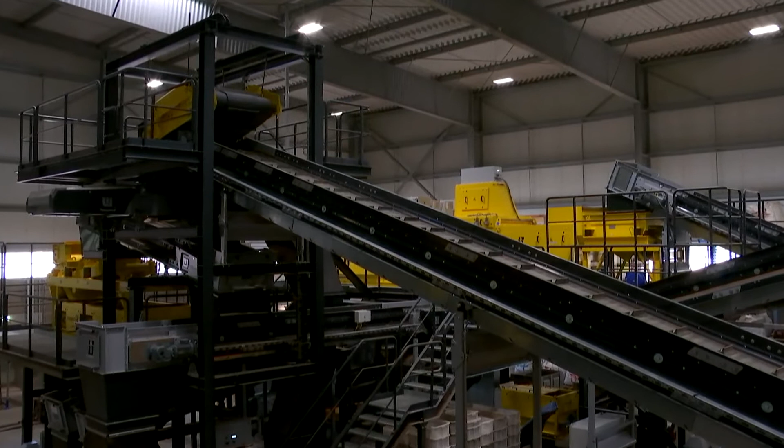We ran out of space at our headquarters in Cologne, and the space which is still available is hopefully needed for more production in the future. As we are doing this investment here, we are also building a new production and logistic hall at the original place downtown Cologne. So right now you have more space and maybe you are able to do more tests and maybe you can also react faster.

That's the goal, at least. But obviously, I think due to Corona, you can understand this, we will not have the chance to run directly at 100%. But the investments are done and the groundwork here, what you see on machines and technology, is already fixed and finished. And for the near future, months, years, we also need additional staff here to work with all these machines. And that means if there's someone out there interested in an interesting job in the resource and recycling industry, get in touch with us.

Yeah, you've heard it, you can apply here. I think about it, yeah.

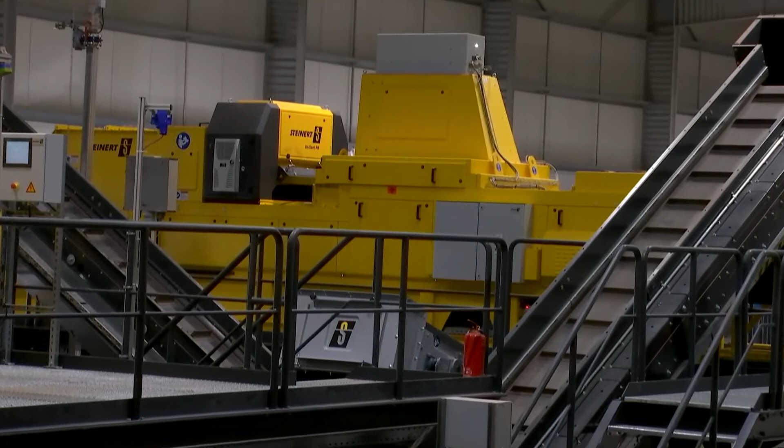So you have spoken about these three divisions. So we have all these 3 divisions under one roof. Exactly. It was a discussion to have, for example, mining elsewhere, but we decided to have everything under one roof because we learned that the application engineers will benefit greatly from each other, from their experience, from their ideas, and therefore we have everything here inside. Another advantage is that our R&D engineers are nearby.

Is everything ready by now? As you can see, the mining line is already complete, finished and commissioned. And what we are here for is the opening of the metal recycling plant. This is finished, and we will see it a little bit later in our video.

By the end of the year, we will also have a waste sorting plant with state-of-the-art NIR technology from our colleagues at STEINERT Unisort in Zittau, right here where we are standing. It's a similar size to what we've done so far. And in January, we will relocate our line sorter, LSS LIBS, from Cologne here to Pulheim. Then we will be able to fulfill the full range of test work for aluminum sorting and alloy sorting here in Cologne, in Pulheim as well.

So I can summarize, everything, all applications, all products are under one roof. Yes, exactly. And in these 3,500 square meters, all 3 divisions are here, and every division has its own industrial scale sorting plant, and this is important.

This enables us to simulate customers' needs. And when we get a task, we can really evaluate the feasibility and the return on investment for the customer. That gives him the certainty to invest into our products and to make his complete investment, which is normally more than just our machines.

I think everyone here spends time both hands-on the machine in the sorting plant and also at the desk or in the lab. So there's no clear demarcation. They can work closely together, R&D, application, and whatever.

You don't only have this new test center, you have test centers all around the world. Yep, over the last years we invested into different test centers everywhere we have subsidiaries, on different continents, in Australia, Brazil, and in the United States. We have production, sales, and after sales, and now we also have test centers everywhere, which is very important to be near the customer, to enable him to get an answer on his sorting task quite quick and near.

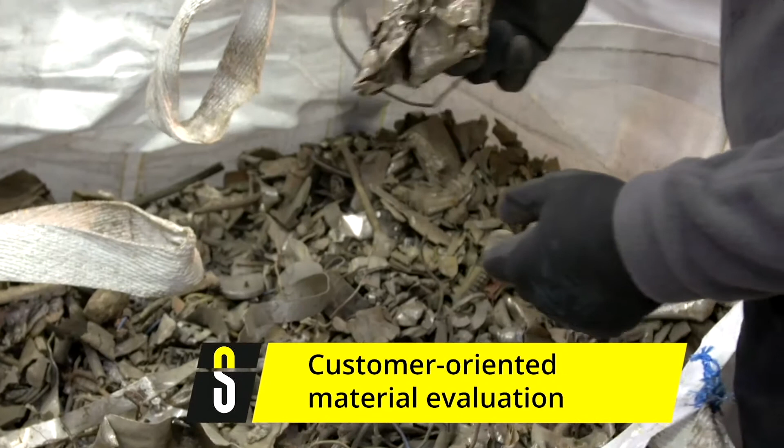Customer test requests often exhibit similarities at first, but tend to differ in detail. We like to receive the material up front to get accustomed to it with pre-trials. Ideally, the customers are present during the testing. Normally, this is the case, and it gives us the ideal conditions to find the best solutions for the customers and their sorting tasks.

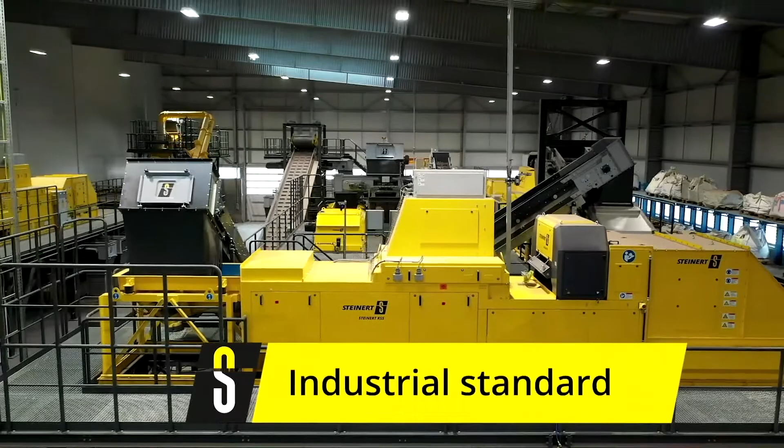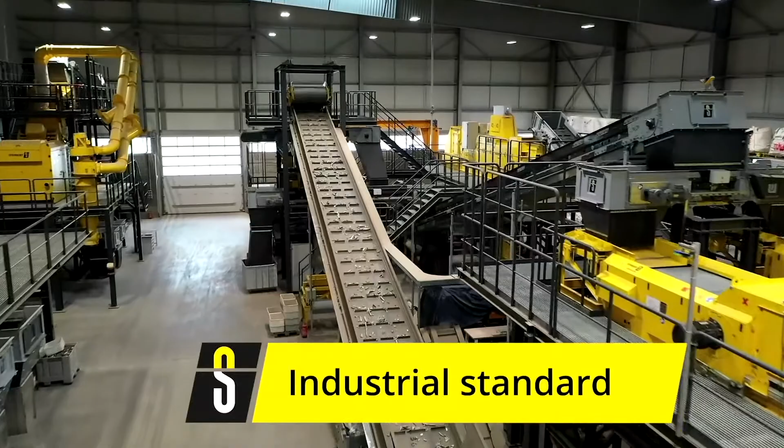With the first test center, we already decided to set up a processing line with industrial scale dimensions. We have stuck with this approach. We focused accordingly on a very flexible process sequence. This was completed with a recirculation flow option for the test material in order to optimize the identification of the right parameters and settings.

The aim of a customer test at STEINERT is generally to develop the right process in accordance with the input material and sorting target. The initial discussion is used to explain ideas and make suggestions on how to proceed. After testing, the results are discussed to create transparency in this type of consulting.

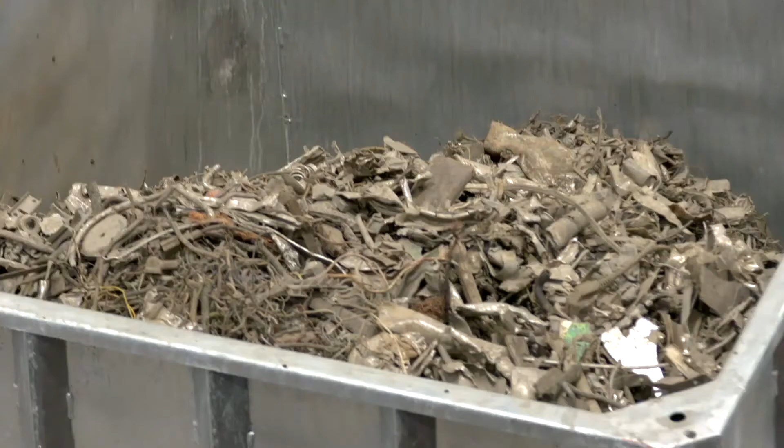The feed hopper already demonstrates that we are working at an industrial scale. The test material is introduced in batches of 0.5 to 2 cubic meters at a time. These quantities ensure that we generate reliable results on the solution that we are recommending to our customers. The material amount for a test mainly depends on specific material parameters.

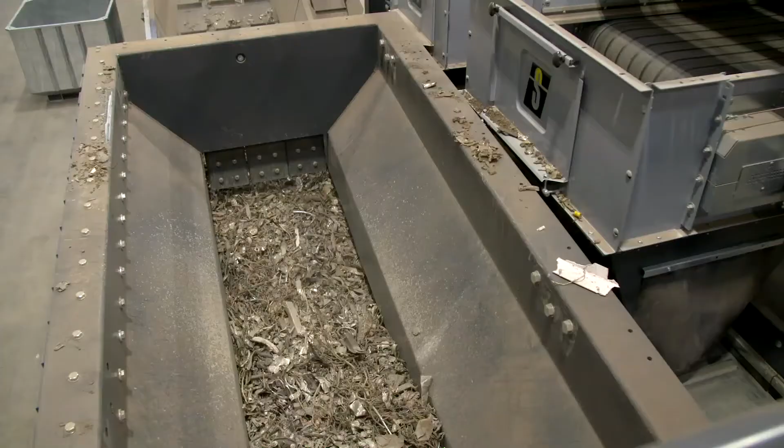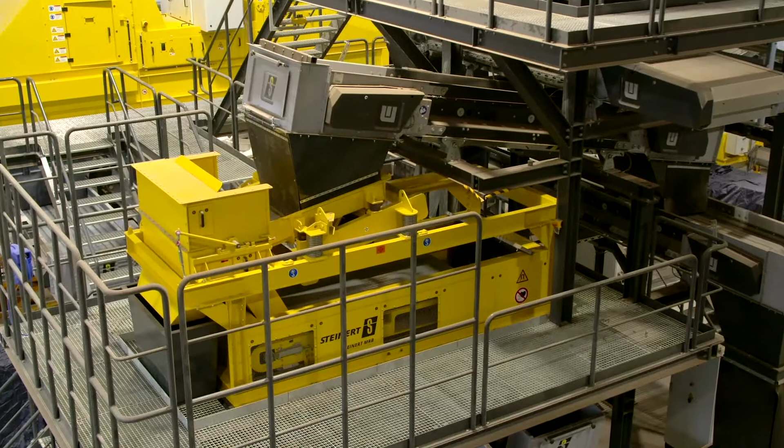The processing line is equipped with different magnetic separators. These vary in material removal method, either pickup or overfeed, and with regards to the magnetic field strength. This provides a choice depending on the requirement between quality of magnetic product and the extent of the ferrous removal.

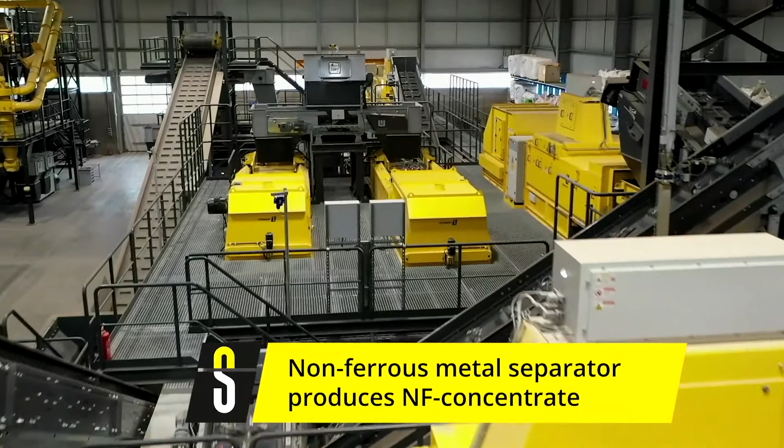After the ferrous removal, a lot of input materials are subject to a non-ferrous metal separation step. For this, we use non-ferrous separators, also called eddy current separators. We implemented the most recent design with a number of variable parameters. In testing, the system is chosen according to the particle size range of the input material. The product of such a non-ferrous separation is a mixture which, depending on the input, consists of aluminium, copper, brass, zinc, and other non-ferrous metals.

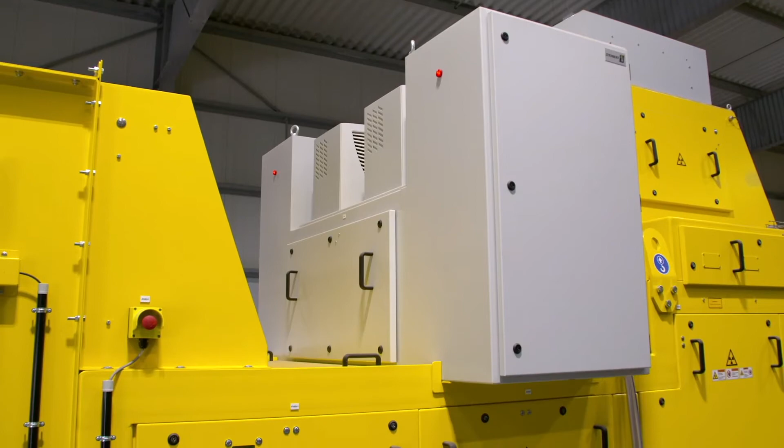In addition to the magnetic sorting systems, the second main group of products are the sensor-based sorters. We offer machines equipped with a single sensor for material recognition. Furthermore, we have been focusing on a combination of multiple sensors over the past 10 years, and we advanced to a system that combines up to 4 sensors. We call this a combined sorting system, or KSS. The abbreviation is derived from its German name. With this, we're able to solve numerous sorting tasks with high efficiency and flexibility.

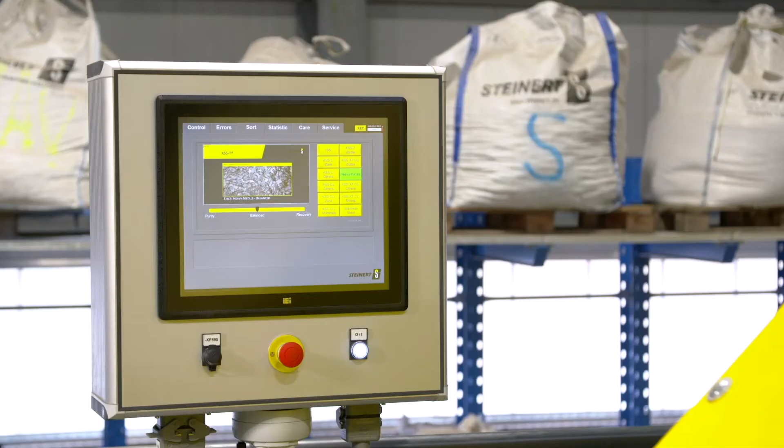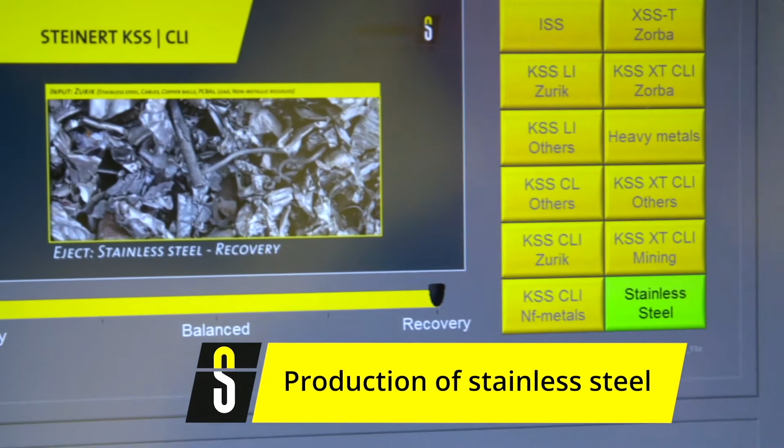The interface on the control has been designed so that it is almost self-explanatory, and especially the sort program selection can be designed individually with program name and image according to each customer. The system has room for 60 completely independent sort programs. It can be used for pre-concentration of special material groups or properties, up to the generation of high-end products.

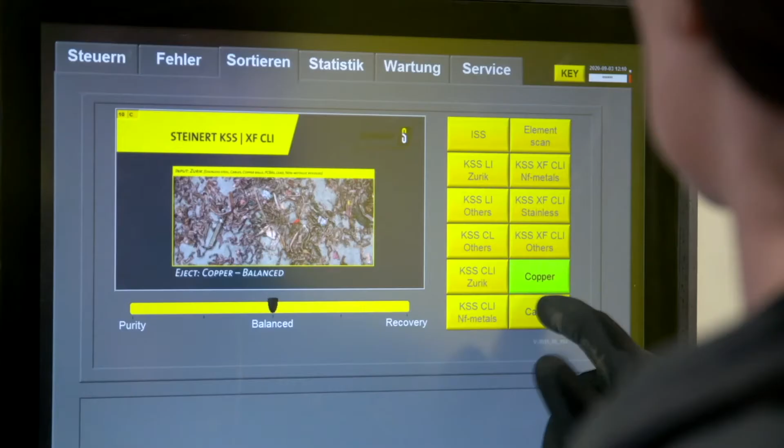The majority of stainless steel items will report to the rest fraction of a non-ferrous separation. From this, it can be sorted into a concentrate by means of sensor sorting. Depending on the combination of sensors in a KSS, purities of up to 99% can be achieved. Further processing steps can be utilized to remove additional material groups from this non-ferrous rest fraction.

Inductive sensing by itself or in combination with other sensors is used to separate a cable or wire product with highest purities. These cable products can then be brought into specific processing lines in order to reclaim the copper.

At this point, we are looking at the non-ferrous concentrate from the eddy current separator again. Using an X-ray transmission sorter, XRT, we are able to separate materials according to density. This system can be used to separate the light and heavy metals which are contained in non-ferrous concentrates from one another. The sensor image of an X-ray transmission system shows the material in a grayscale picture.

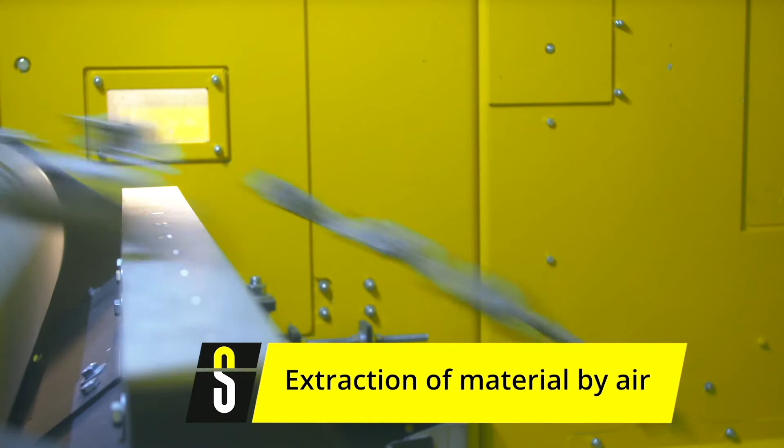The extraction of objects out of the material stream happens via compressed air bursts from a valve bar. The example shows the extraction of heavy metal objects out of a non-ferrous concentrate. The light metal product consists of numerous aluminium alloys and often contains small quantities of high alloyed magnesium. The heavy metal product mainly contains copper, brass, zinc and other heavy metals.

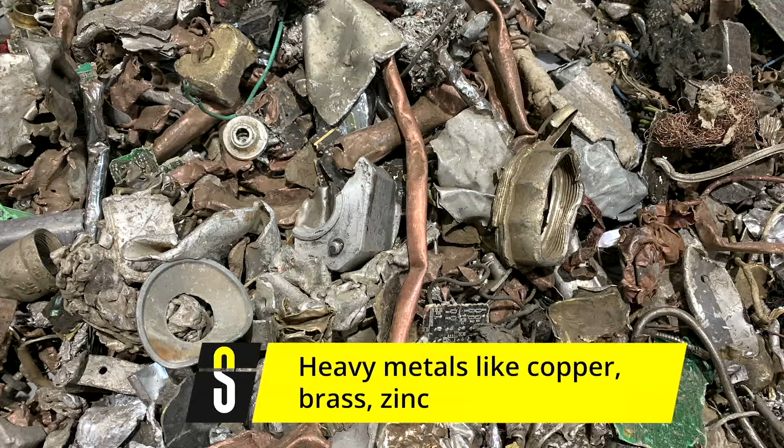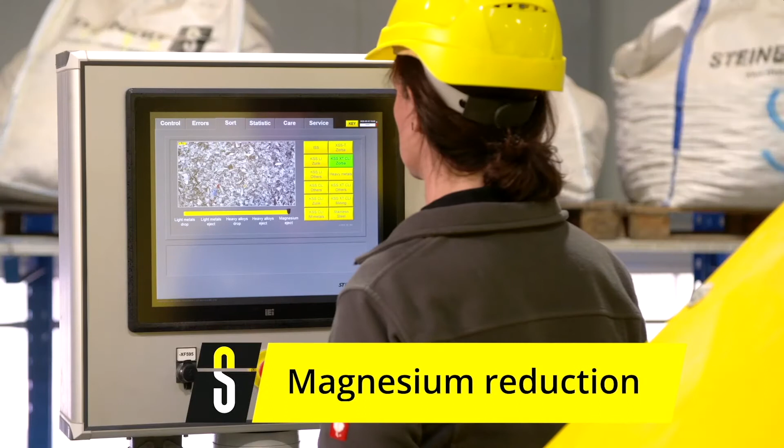These can be further separated using X-ray fluorescence. We will come back to this point at a later stage. X-ray transmission offers additional possibilities for efficient material processing. The light metal fraction, for example, can be further separated to generate a wrought and a cast aluminium concentrate. Furthermore, with some special adjustments to the detection, we can achieve a separation of free magnesium pieces of up to 97% to generate high-quality aluminium products.

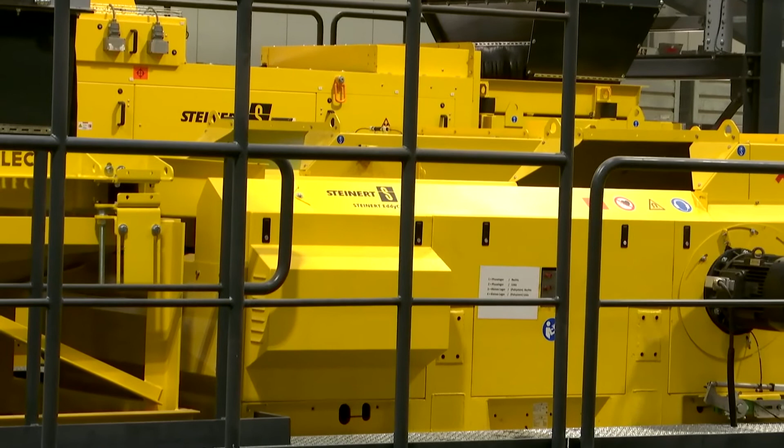We have STEINERT magnets and eddy currents in use and like the way they are engineered in their reliability. Are you planning new developments? Good to hear that this customer likes our technology. We have heard a lot of sensor technology today, and for the moment it's a market need to be more in this complex technology to follow the requests from the market. But we all know that sensor units can only work if a really good magnetic separation is working up front. Historically, we are coming from this kind of magnetic separation, and for us it's still a really important product. Yes, we are doing more development to increase performance, and to give better handling opportunities for customers. This is in work and it will come soon, but I don't want to go too much in detail now.

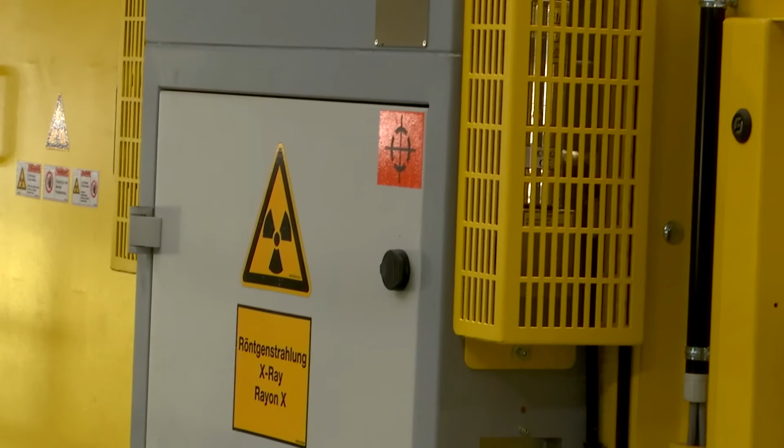Yes, it exists, and it exists here at the test center. We have it here, we can do tests with it. We use X-ray fluorescence technology for this. This technology creates a very deep analysis of metals, and precious metals are also heavy metals, so we can detect and separate, for example, gold, silver, platinum. It's an important issue in the e-scrap business. That means out of e-scrap we recover these precious metals, as well as from incinerated bottom ashes. Golden rings, everything is in. You can't believe all of this we can eject with our fluorescence units.

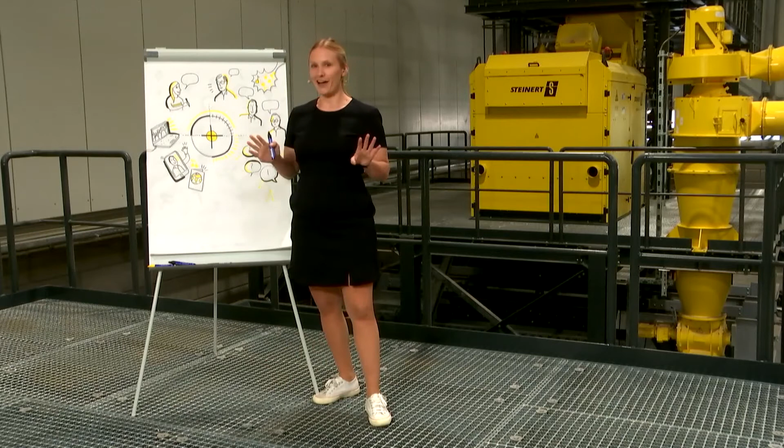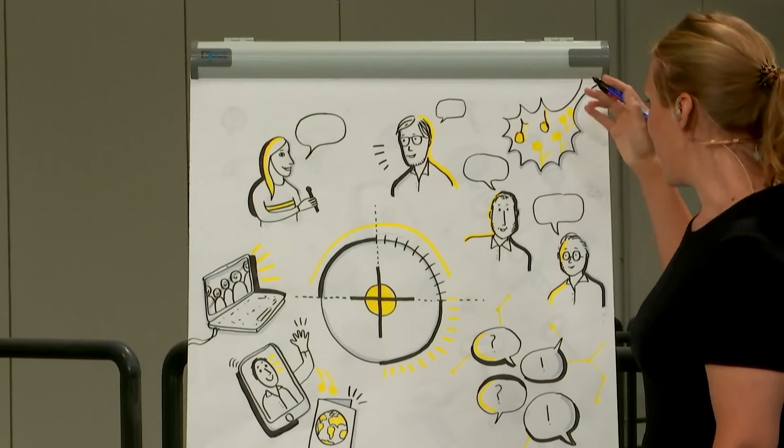So I've been drawing this entire hour. I included everything. I got your research search engine, I got even you, Janine, I got the music from the beginning, and I got all the important people like Herr Funke, Dr. Schmalbein, and Herr Hoffmann. And of course, I included the question and the answers, but just on the surface, not really in detail. I didn't have time for that now.

And I drew you guys, everyone watching online, I drew you on this laptop screen. This is where you are. Maybe we can zoom in a little so you can see yourself exactly. And of course, we got congratulations from all around the world, from 3 continents, and I drew them here. So thank you, everyone, for the congratulations.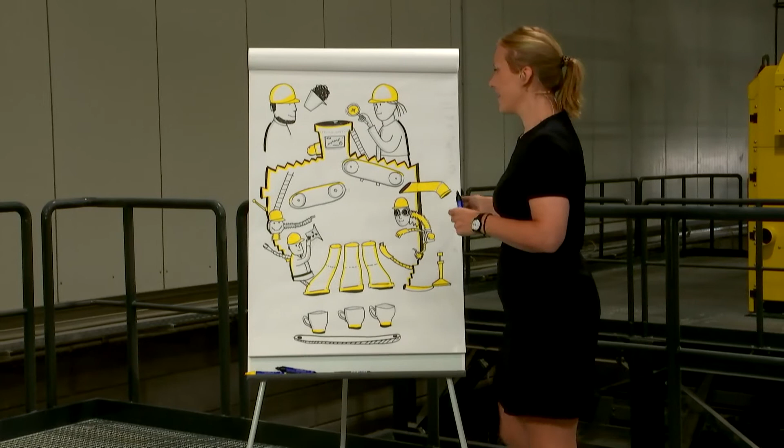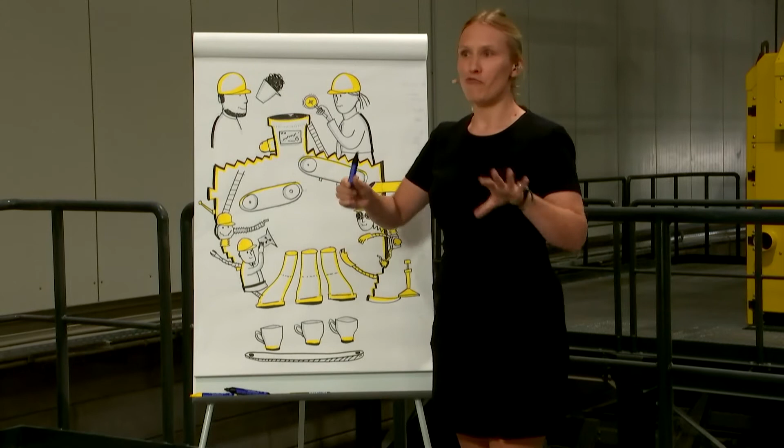Here's the machine. As you can see, 100% industrial standard scale. This is all one-to-one drawn because I'm surrounded by it. You know, I'm actually right in the middle here on my little platform. And honestly, I've seen so many TV studios in my life. This is the best studio I've ever been in.

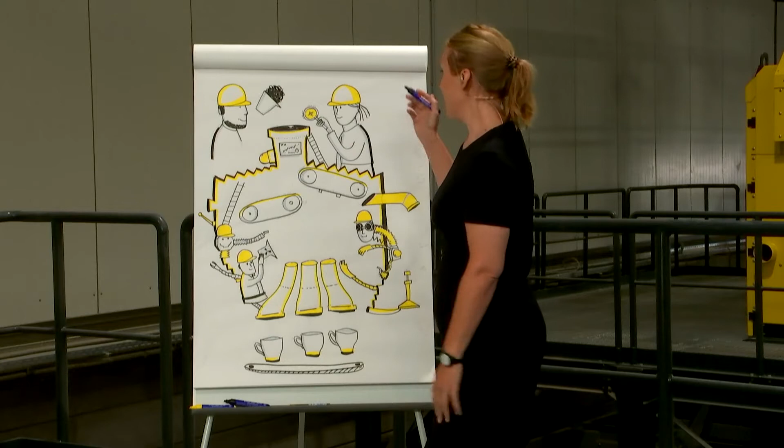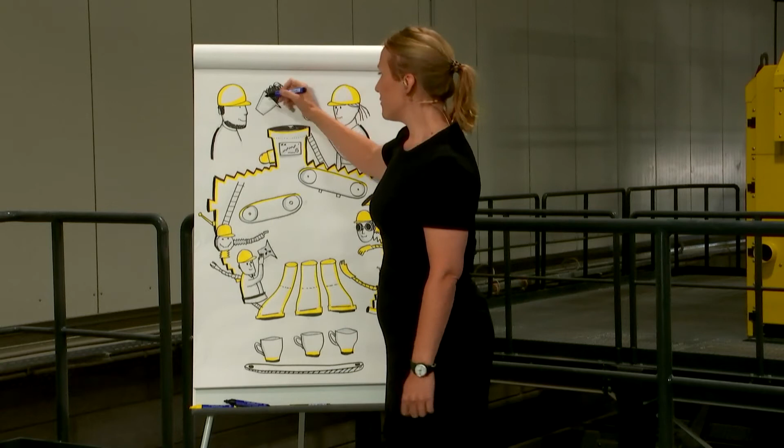So let's look at our machine. We got the STEINERT personnel who's checking out the material. We got the material here, and we got you, the customer, here. And you're doing the process consulting, and of course, depending on the material that you're bringing, it depends also on the goal that you want to have at the end.

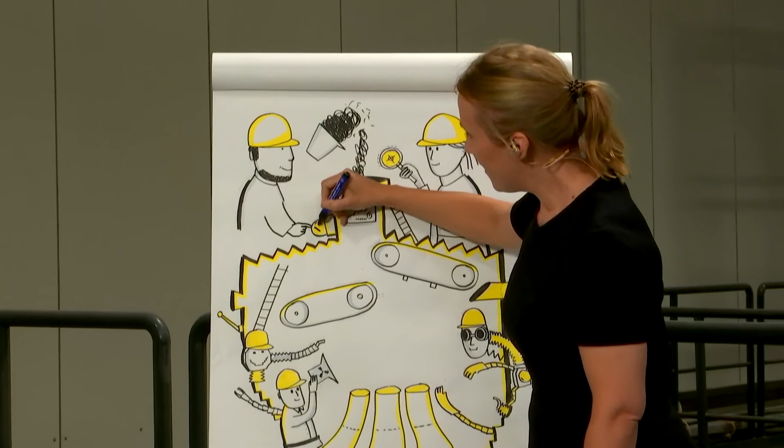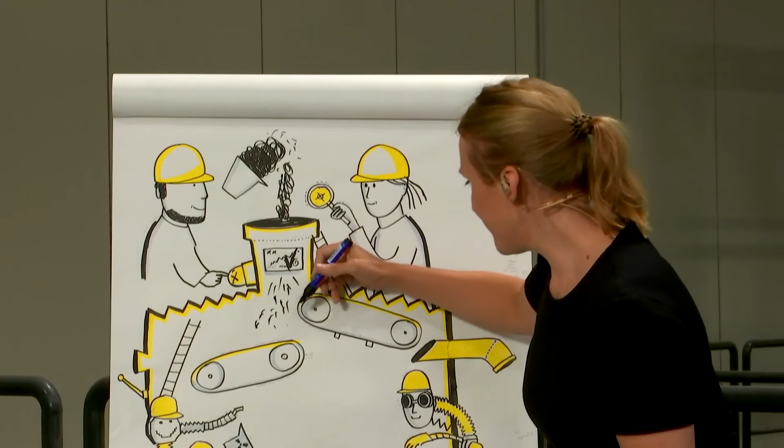So let's throw down this material down the throat of the machine. But first, we got to press the button, huh? And I'm going to press the button right here. Get the right program, and then let's throw down the material down to the 2-stage magnetic separator. And you see the magnetic separation right here. This is exactly 100% how it looks like on here.

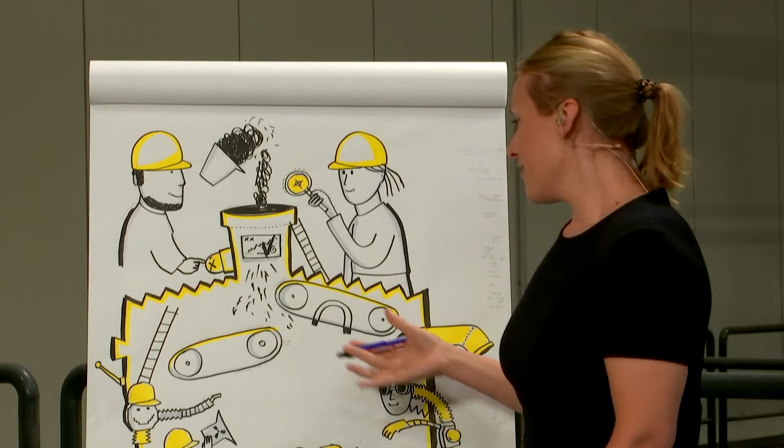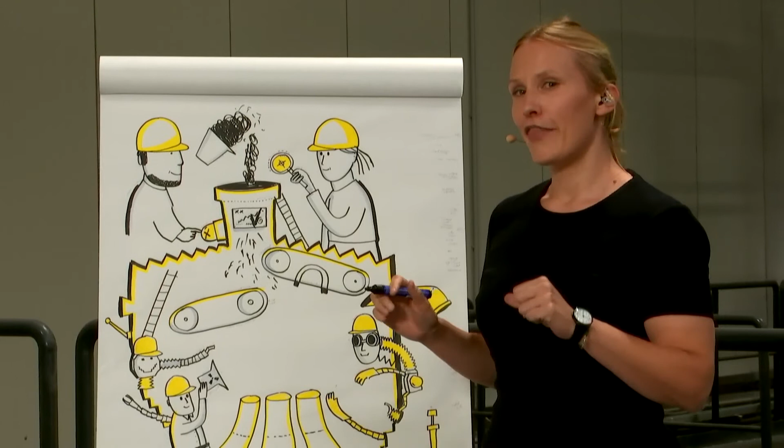And then we have the non-ferrous metal concentrate. And of course, we talked about the 4 sensors. Are they all necessary? Whatever fits your material. So I drew them all because there are more than 60 programs, and I'll show you my personal program. So we have, first of all, the laser sensor right here.

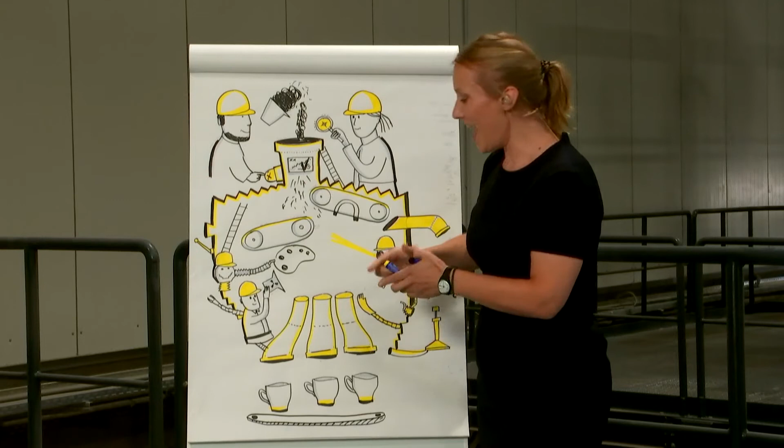We have the color sensor, depending on the color of the material, of course. And we have the X-ray. We talk about that later, I believe. So this is just a small detail.

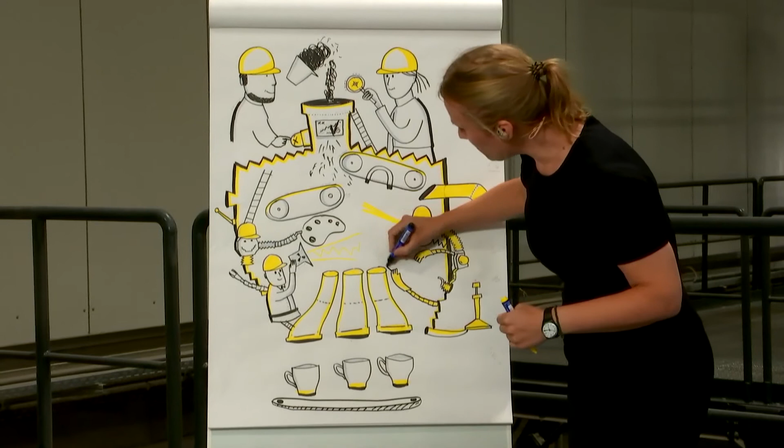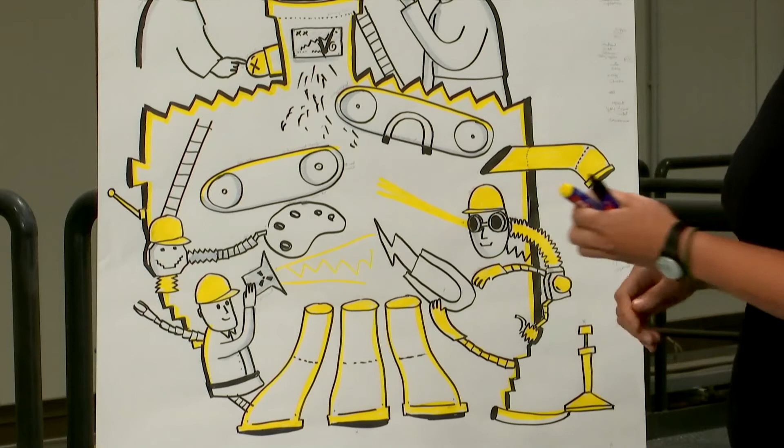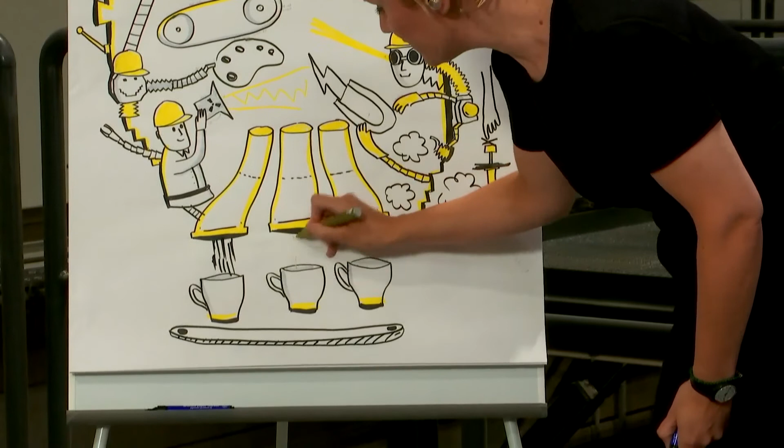And of course, we have the induction. There we go. But this is not it. At the end, what was that? We needed the compressed air burst, and I put this right here, so we need to press that too. Let's press it down, and get some air in here to separate the material, and at the end have your product that you can, of course, use, sell, reuse, or put back into the material cycle.

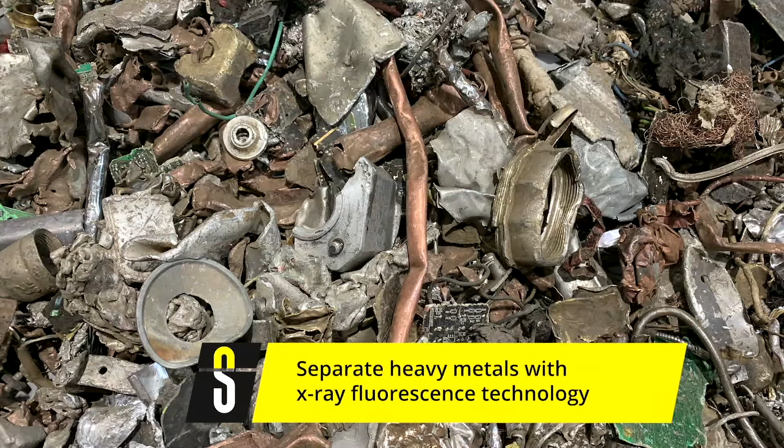X-ray fluorescence technology enables an advanced separation of mixed heavy metals. Due to exposure to X-ray at a certain energy level, metals emit characteristic spectra which enable their separation into, for example, copper, brass, and zinc. This effect can also be applied to concentrate valuable metals such as gold and silver.

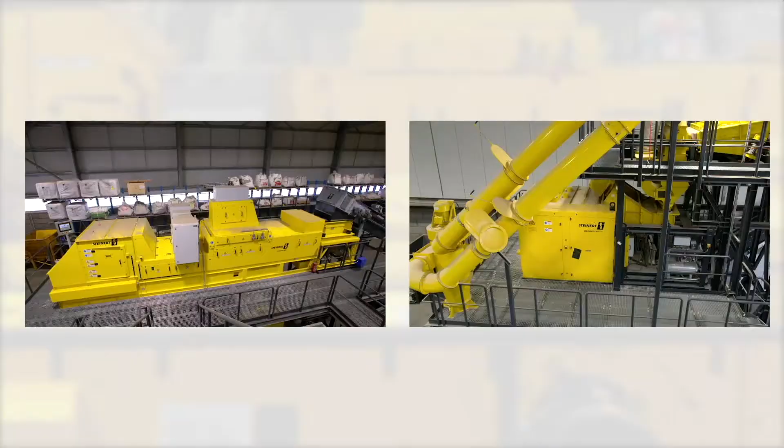Belt sorters, such as the KSS XF, are most suitable for separating heterogeneous materials with regard to particle size and shape. Chute sorters operate with higher efficiencies when the properties of shape and particle size are more homogeneous.

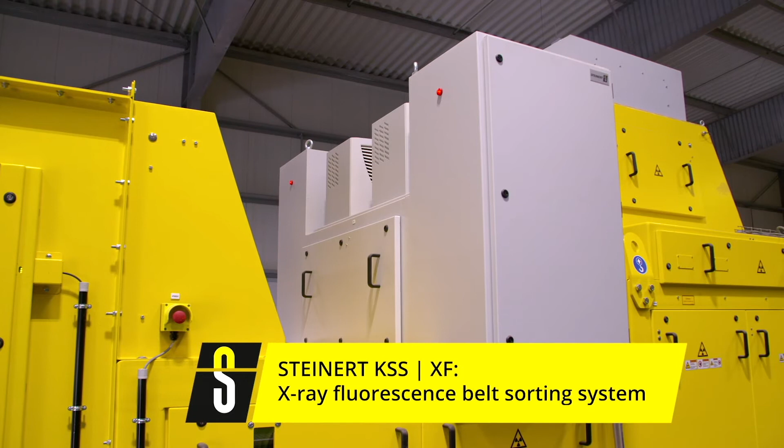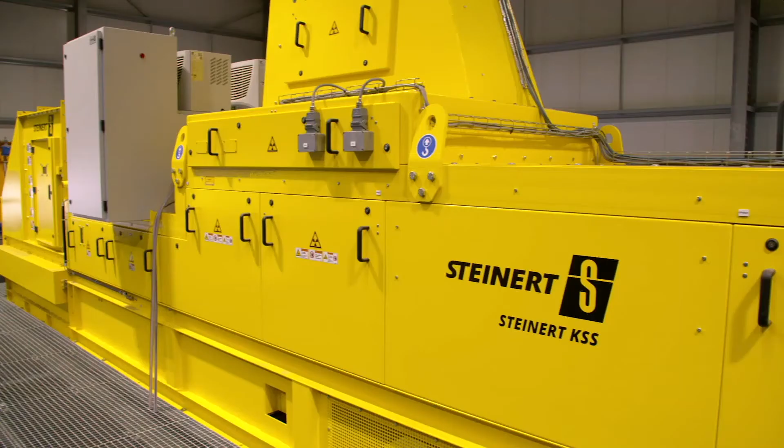The next step is the separation of a copper product out of a heavy metal concentrate. Due to the coarse and wide size range, this material is processed on a belt sorter. An efficient material feed distribution is a key factor for a successful sort.

Material infeed happens via a vibrating feeder that transports the material onto the belt and distributes the objects evenly in the transport direction. As seen in the previous video, material extraction is done by compressed air bursts. For ejection, pressures of up to 10 bar can be used in order to remove even the heaviest objects, such as large copper items.

The copper product can exhibit purities of up to 99% and can be applied as feedstock in smelting facilities without additional processing. Along with copper, zinc and brass concentrates are common sorting products out of heavy metals.

In addition to the detection of base metal alloys, X-ray fluorescence enables the recognition of surface coatings. One example is nickel or chrome-plated brass items used in bathroom appliances. These can be identified efficiently according to their specific surface characteristics.

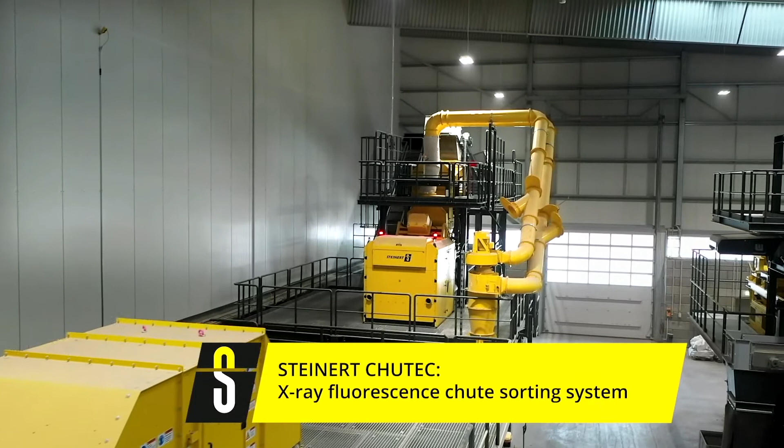In the field of heavy metal sorting, the CHUTEC allows an efficient sort starting at particle sizes of approximately 4 mm. The material is presented to the detection area and extraction occurs after moving over a steep chute. The material is therefore not scanned while positioned on a conveyor belt, but in flight after the chute. The distance between detection and material surface thereby remains constant, independent of particle size.

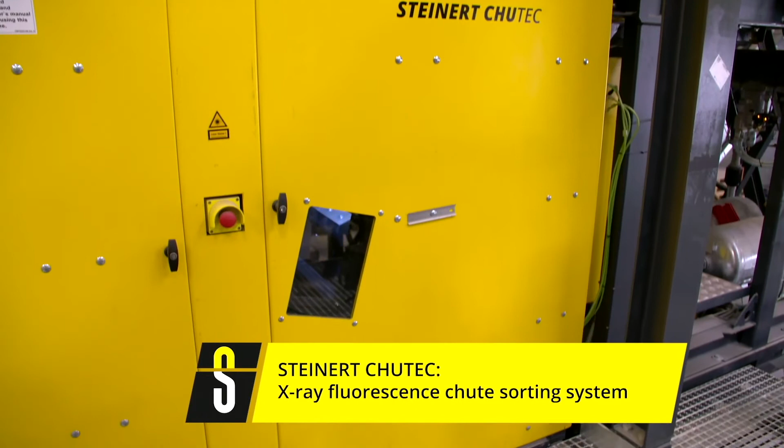Especially in the particle size range below 20 mm, the CHUTEC has a strong advantage due to detection in flight and an advanced sensor resolution. The development of this system is a significant extension to our X-ray fluorescence portfolio. The addition of this processing line in the test center is most valuable in finding the most suitable solutions.

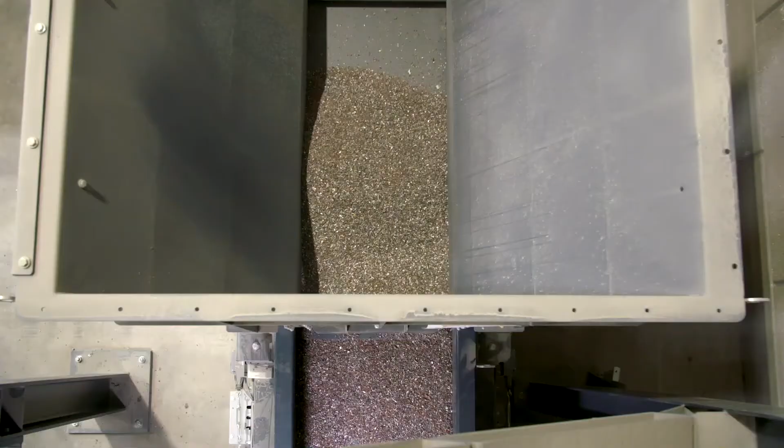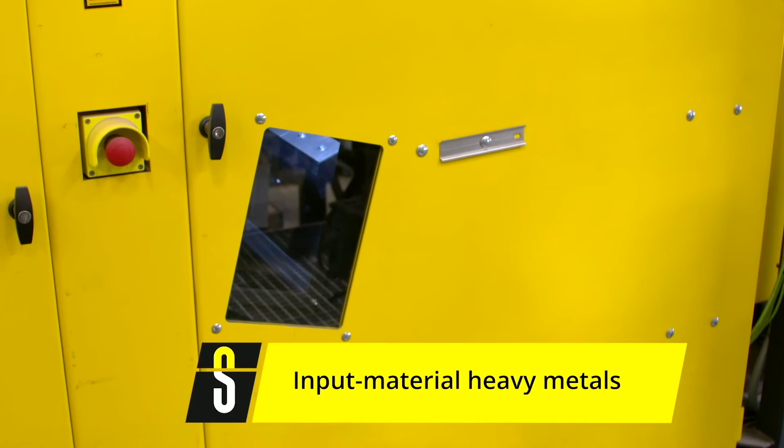The material shown here has a size range of 3 to 15 millimeters. It is fed into the process using a magnetic vibrating feeder to create a constant and even flow. The ejection system in this case is also a valve bar. However, here the standard valve grid of 12.5 mm has been complemented by adding a second grid with a spacing of 6.25 mm per valve, to be even more flexible and efficient for the finest material.

The result is a copper concentrate and a rest fraction which predominantly contains brass and zinc. These products can be separated in additional processing steps.

Do you have potential rental machines for in-field tests to test high volumes? Yeah, some of our equipment we offer as a rental unit as well. Sometimes it makes sense to put a machine in the field just to have the possibility to look at the results over a longer period. If the customer has changes in material infeeds or qualities, he can only see after a long period of time how efficient this unit is working, and if it's really a business case for him. Yes, we have.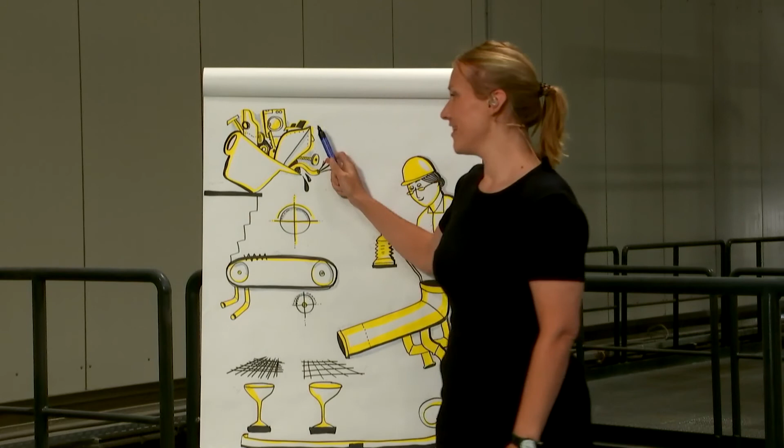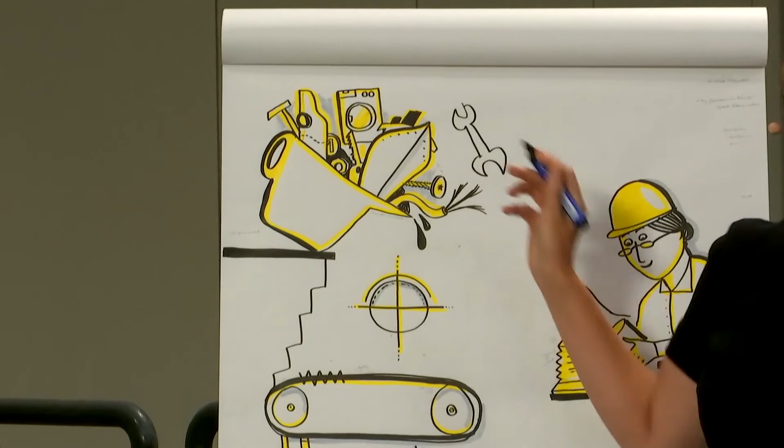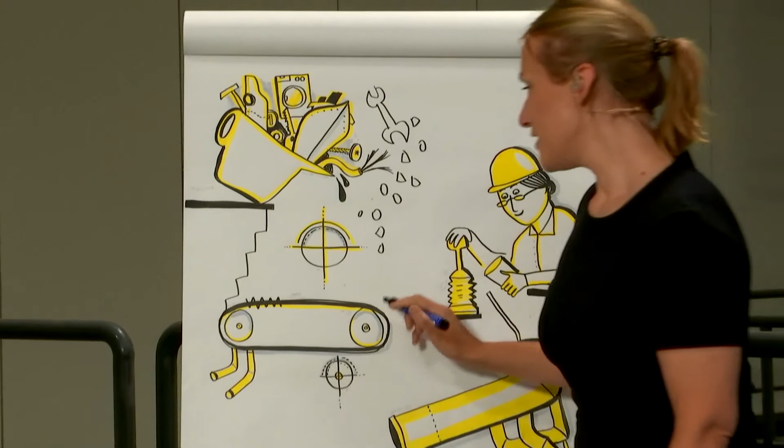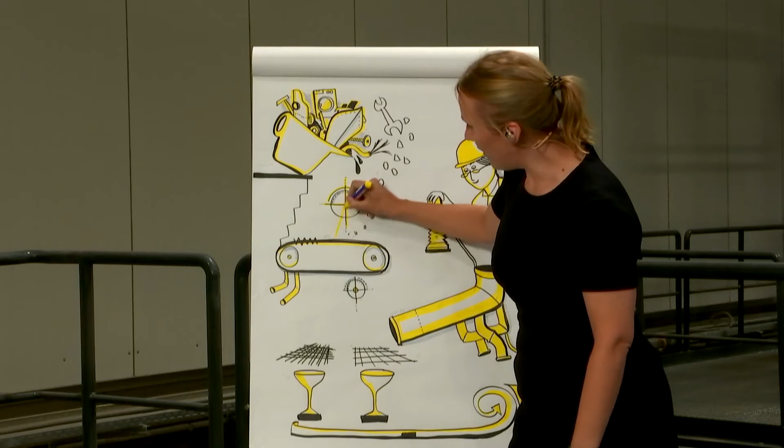I want to show you the X-ray fluorescence technology, and it's right here. We have the heterogeneous materials right here in the box. Now, I know we're not throwing down an entire boat or a giant cable or a washing machine — I'm aware of that, but let's just assume. So we'll throw down the materials. We talked about two different ways, and I understood that the more heterogeneous ones land on the vibration and then get evenly distributed on the belt sorting system. Let's throw them on there. We've got the sensor here, and the X-ray sensor can detect the surface and sort the materials according to how they actually are.

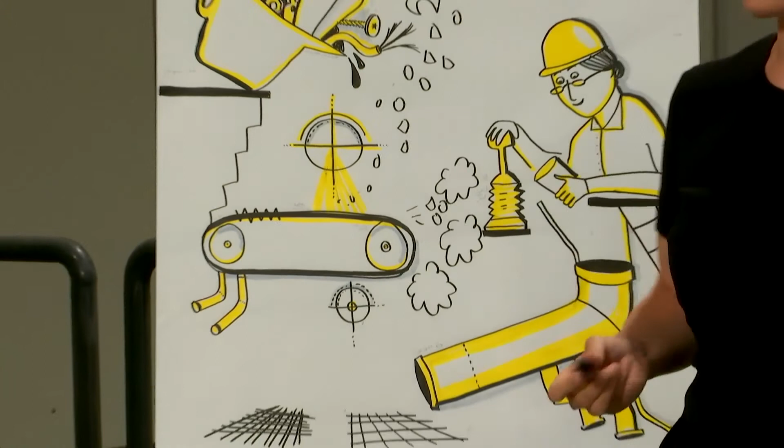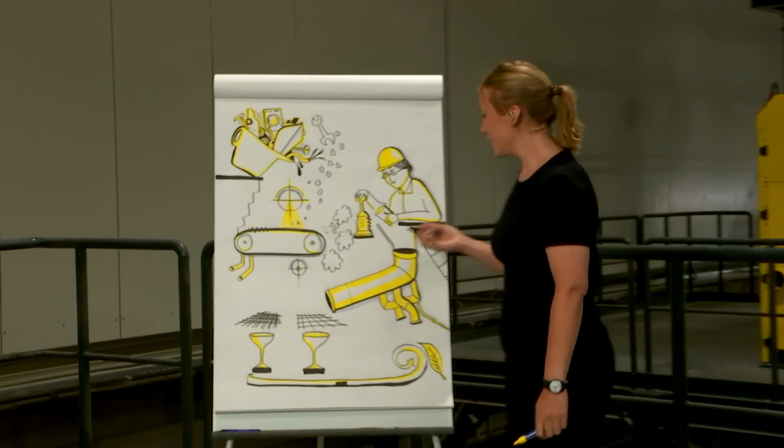And again, we need the compressed air, so let's push it and separate the materials with our air. But that's not all, right? There was another thing, and that's the chute — the chute sorting system, and I'm standing right next to it. Actually, I'm standing right in the middle between the chute and the X-ray belt, and this is just so cool to see right here. So let's look at it. The finer materials, the more homogeneous materials, let's throw them down into the chute, and they come out right here.

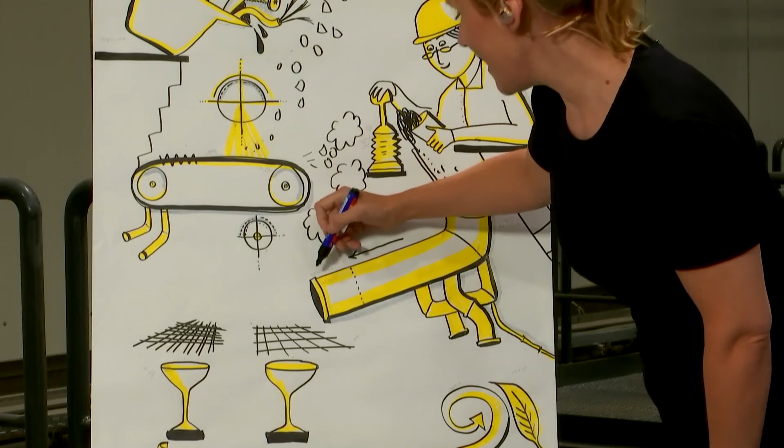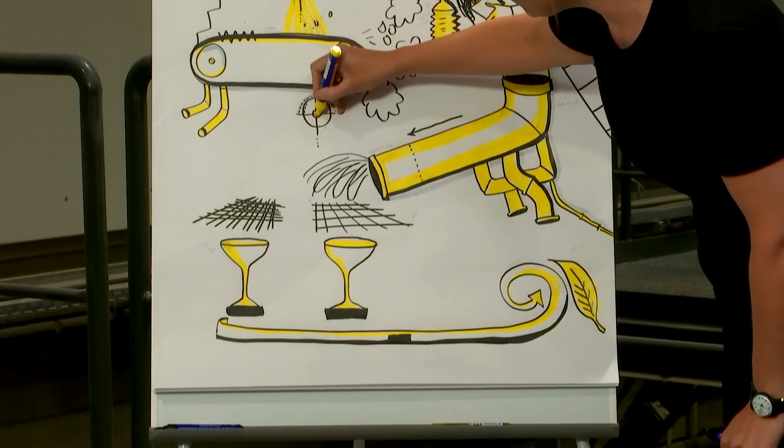They have the in-flight detection, and then they shoot it down here. This is exactly how it's going to look like in the test center, just like this. And again, we have the sensor, this time at the end, and then the materials throw down through this grid, or hey, why not the bigger grid?

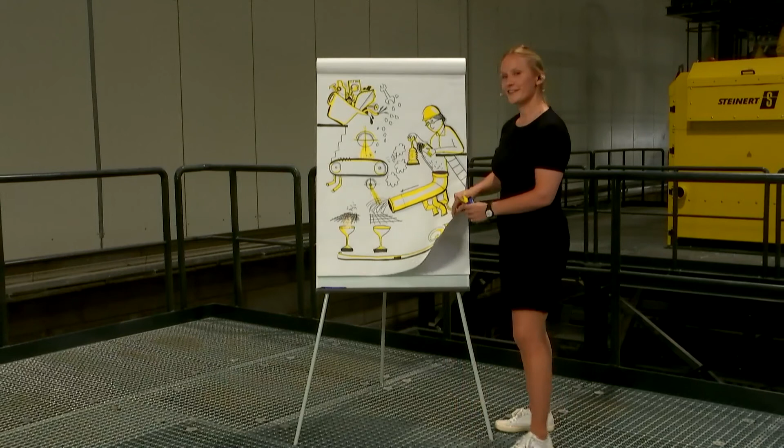And then at the end, we got the product, like, for example, 99% copper to use, recycle, or sell off. And you know what? I was wondering how does 99% copper look like? I drew it for you. Because today is a celebration day, it's not just a normal work day here at STEINERT. I drew a special cocktail of 99% copper just for everyone today.

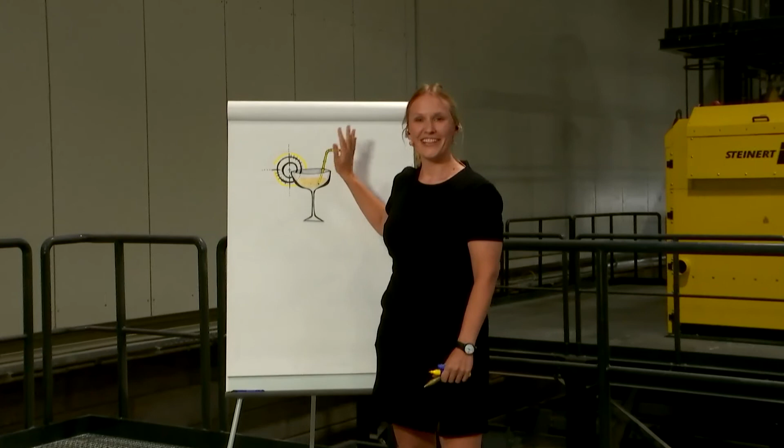Thank you very much. Thank you very much. That was my time, and I'm going to send you back to the main stage, back to Janine.

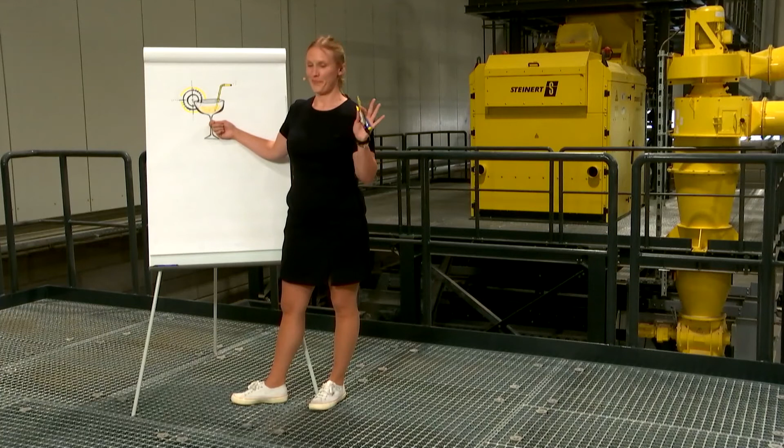Thank you, Ingrid. I think one screw was missing, but you have some minutes until the opening moment, so fingers crossed. Ingrid, right now I have to say goodbye to you, but I think you will listen and watch the whole show until the end. Thanks so much for your work, for your painting, and I think your painting will find a place here in this hall, as a nice memory of the official opening ceremony for the Test and Development Center.

Because right now we are coming closer and closer, and for the official opening, I'd like to welcome back on stage the CEO of the STEINERT Group. Welcome, Peter Funke. Welcome back. Is there anything you want to say just before the opening?

Of course there is. I would like to take the opportunity to say some words of thanks to the team here, and especially to these guys. Nico, first of all, thank you very much to you and your team for setting up this incredible sorting center here. It's been a lot of hours and extra hours the last months, so I have to thank you and your team very much. Karl, thank you very much for the input to this event and your always creative feedback, which is always welcomed.